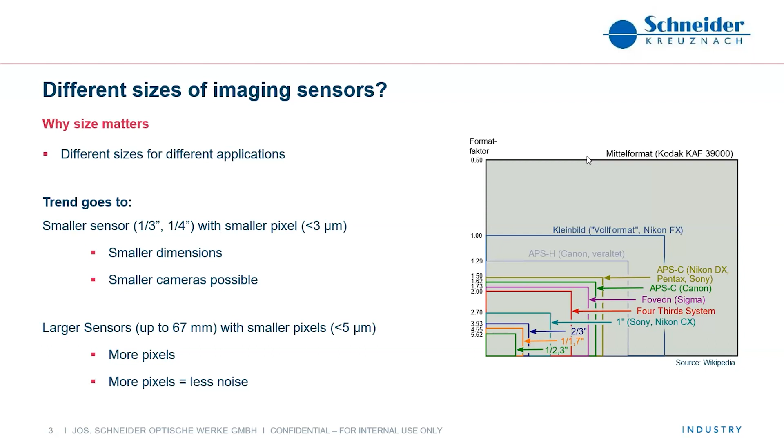So why large sensors? As I said, it allows you a higher resolution or a higher number of pixels. It allows you a lot more information due to the fact you have got more pixels available. And for this, you get more details. You can also say more resolution, more sharpness in the picture, so that you can make more details visible. And at the end of the day, this is always a bit struggling, but you also can catch more light on this area.

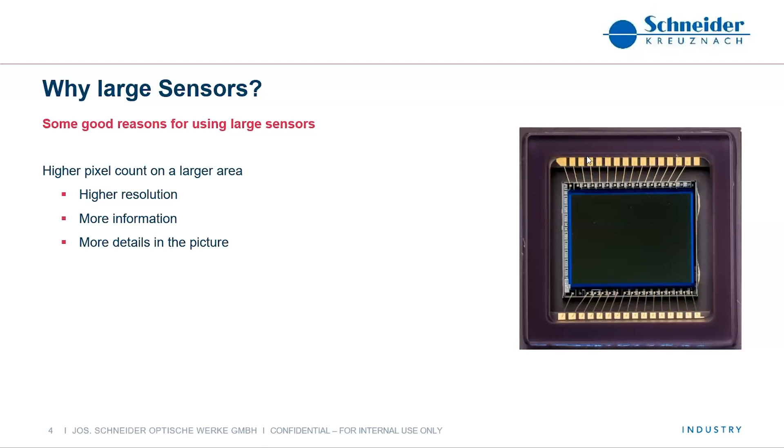So the next topic we are talking about here is line sensors, line scan sensors. Everybody can ask, why do we need a sensor which is just one line with 1, 2, or 3 pixels, depending on the application, depending on the camera, depending if you have got a monochrome or a color camera, which makes slight differences. Also here, the simple answer is you get more information.

Just for example, I've done some simple research. The IMX 461 has a bit more than 11,000, 11,648 pixels in one line. And a 16K sensor has, as the name says, over 16,000 pixels in one line. So if you have got a certain application, you get the most possible information out of the sensor. And this also means that with a 16K sensor, I can cover a wider field than any other area sensor at the moment in the market, I would say.

Then the other big advantage is that you have less data, which you have to read out and which you have to work on later in the computers. This saves time at the end of the day, which also means you have got a higher speed in the imaging as a result.

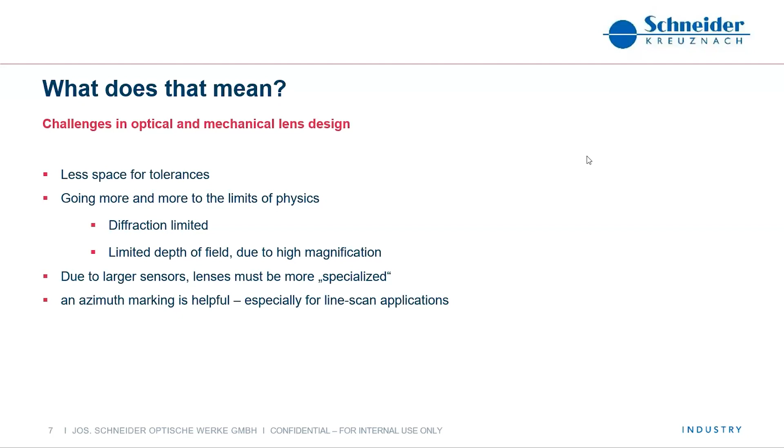And so this means also for us, if somebody is using a large area scan camera, we have to talk to our customers, to our clients, about what exactly they want to do, so that we can make the right choice for the right lens.

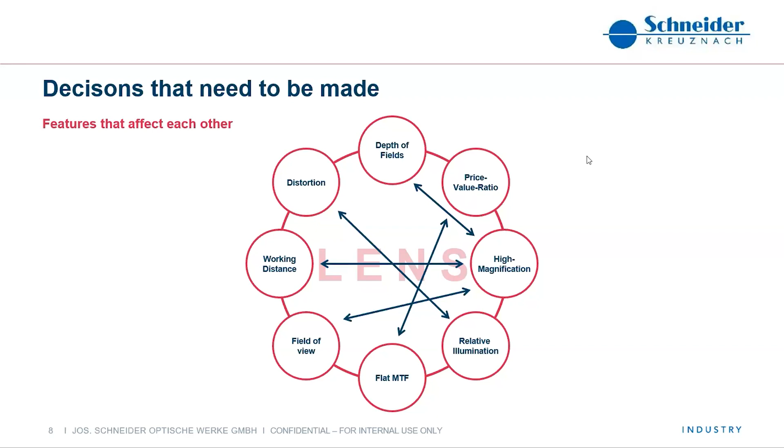For the next few slides, I really would like to go a bit to the application and what challenges we have and what we have to think about. I already mentioned printing as a typical application. What does this mean? You have got a wide field, because these paper bands running through the printing machine are mostly several meters wide, for a newspaper, for example, or for some advertisement. This means that you have got several, mostly 2 or 3 lenses side by side to cover the whole range.

Mostly you have here a line scan with a width of 82 millimeters. So we are also limited in the choice of lenses. You need the highest resolution possible. So we need a 16K camera, mostly between 3.5 and 5 microns as pixel size. Which makes life a bit more challenging, as mostly we are also using color. Perhaps we want also to check if the colors are correct.

So we need more than one camera mostly to cover the whole field of view, and this also means afterwards we have to stitch the image, which a line scan makes easier. As we learned before, we have a reduced information or data quantity we have to transfer. So the goal here is definitely to check the quality and the printing image, if everything is fine.

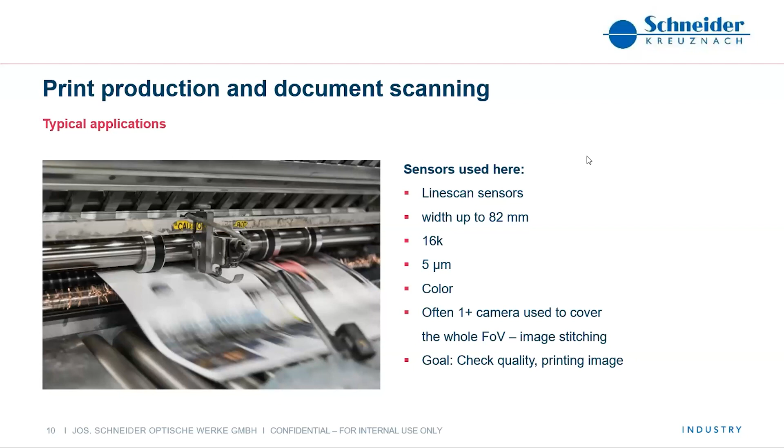What we have to think about here for the lens: for sure we need a wide image circle. Sometimes we also need a wide opening angle to cover everything. We need a high color correction, and last but not least, the lowest distortion and homogeneous relative illumination. For these lenses, we have in our assortment, for example, our Pyrite series, which I think is pretty well known, and also our Zirconias, which are really easy to handle lenses, especially for this application.

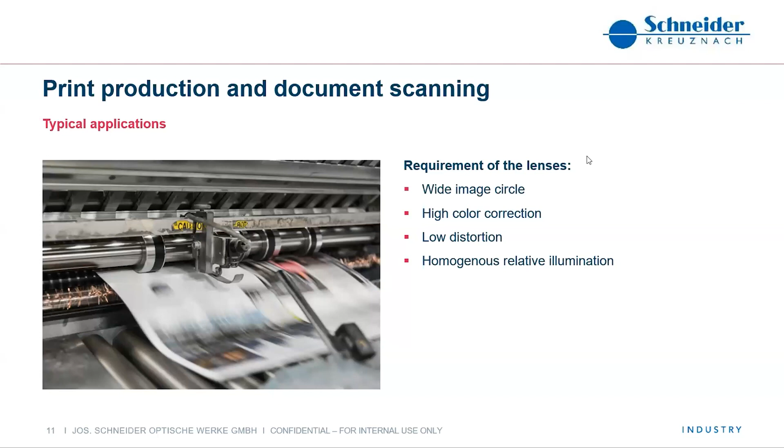I would say more or less the same. It's also paper production. Here we have a bit more challenges. Also here the quality check, but here the paper is normally, let's say, mostly white, and you have to detect some scratches or some streaks and cracks behind. But you have a low contrast, so you need a high resolution.

You also need, due to the width of the whole field, large line sensor cameras, 16K, as I said, with high resolution, ideally with 3.5 microns, which makes high demands on resolution at the lens. Mostly it will try to cover it with one camera, but mostly it is not possible. So also here, I repeat myself now, we have to cover a good image quality in total.

Our recommendation as lenses here would be, again, the Pyrites, because it's the most generalized lens we can offer in this case, but also a really high end lens, the Diamonds. For smaller machines, we can also give our new 2Lite, which has a good high resolution and a wide field and is covering a good sensor up to 28 millimeters at least.

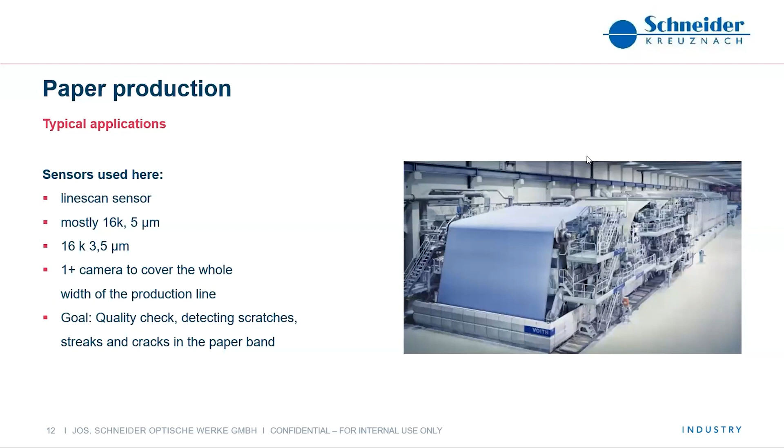Yes, as I said, a wide field of view and lower magnification are good to have here, and nearly no distortion. And due to the high resolution, we need a good and constant MTF up to the edges.

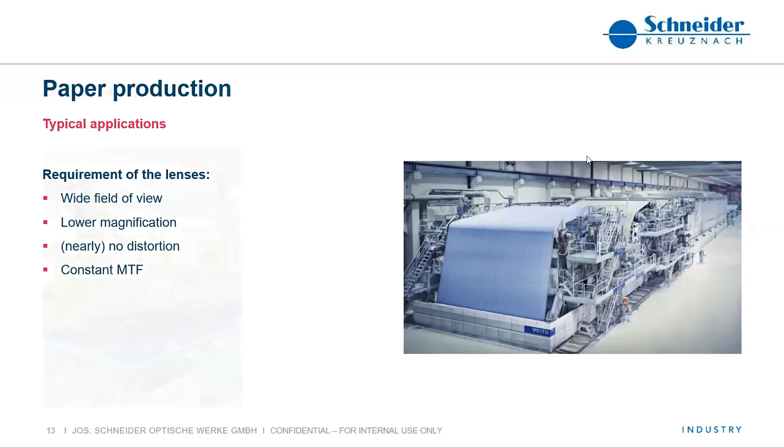Solar inspection. I think due to politics and also the problems we have with climate, it is getting more and more important. Also here in Germany, production should be brought back to Germany. So it is becoming an important market and important application. But here, in contrast to paper and printing inspection, it is very important that you have a large area sensor with a high resolution, or let's say pixel number to be correct, larger than 25 megapixels.

Also here, I would say, detecting damages in any way. Are there any scratches? Is the bonding of each panel correct? Do we have a connection where it should be? Is the frame proper, and so on? So for this we need high contrast and a high MTF. And last but not least, we also need a high magnification. Magnification of 1x and higher is pretty normal here. And also, as I mentioned, the high MTF, so that you get every single detail over the whole size of the sensor.

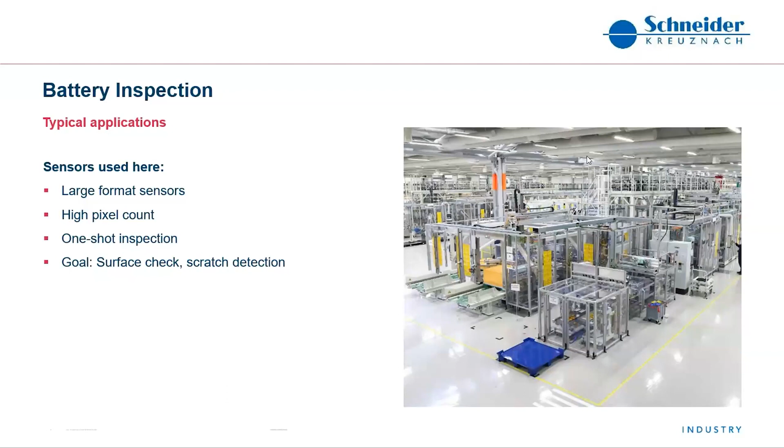I think this is now my last example, for battery inspection. It is more or less the same as for solar inspection. Here, normally it detects the layers in between every battery cell. They must be okay. There could be some scratches, something broken, and for this we need again high magnification, as I said, 1x, 2x and higher, high contrast, and a good MTF for the whole field of view, so that you can see even the smallest scratches at the edges, which is pretty important, I would say.